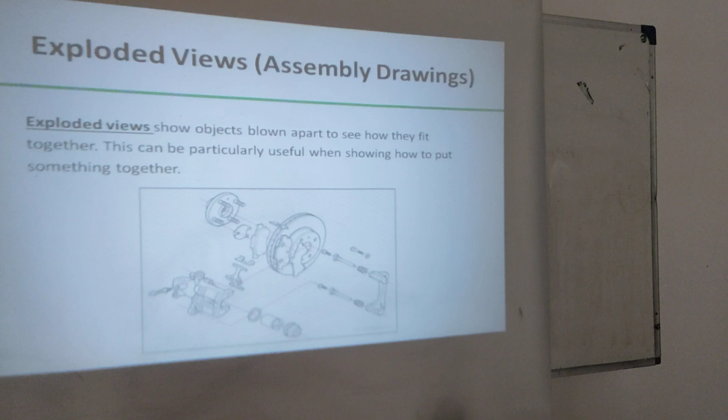So, today's class, we will explain exploded views, which are assembly drawings. This is again one of the methods, one of the types of drawings, we would say, that is used sometimes in design. Not always you require an exploded view, but if any of the items that you're designing, any of the objects, has a lot of parts, it is advisable always to have an exploded view as part of your engineering drawings, because this will clarify each part, what it will be, and how they come together.

So, exploded views show objects blown apart to see how they fit together. So which part goes where. So it's like an instruction. Like if I look at the object assembled, like this table, everything is now together, all the parts. Maybe I don't know, if I receive it in separate parts, how to assemble it together. So it shows you how you can assemble something together and disassemble it apart.

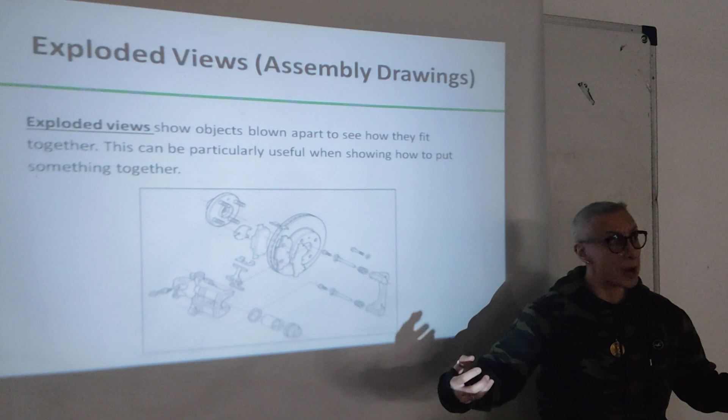Also, if you draw this kind of drawing, anyone who views it knows each of the parts, knows exactly how many pieces you have, what their size is. So anybody can make, produce, manufacture your designed idea. So all of these parts are clearly visible and where each of the parts will come together. So these drawings are very useful, as I said, if you have designs that have several parts.

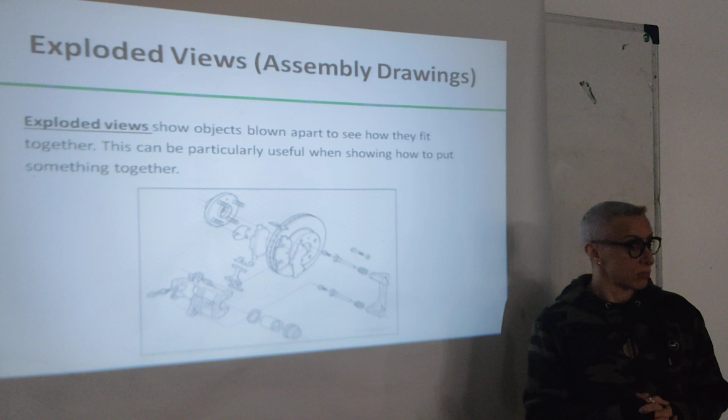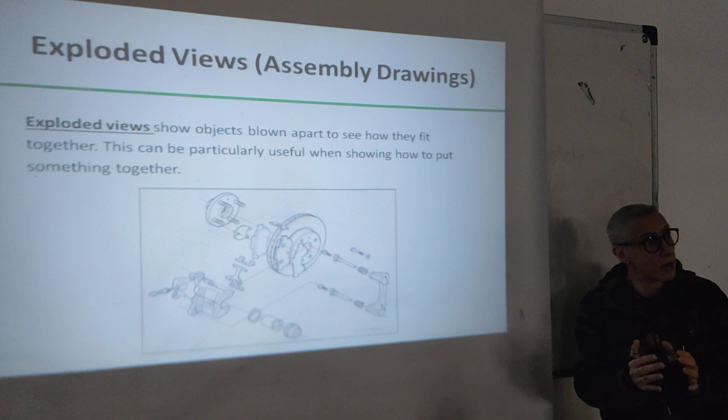And most of the designs have parts. This table is made out of many parts. This chair is made out of several parts. Some designs have hundreds of parts. Some designs are more simple with fewer parts. But if you're designing any object, it has parts most of the time. So these kinds of drawings are very useful in this regard. So it shows an object, basically everything apart.

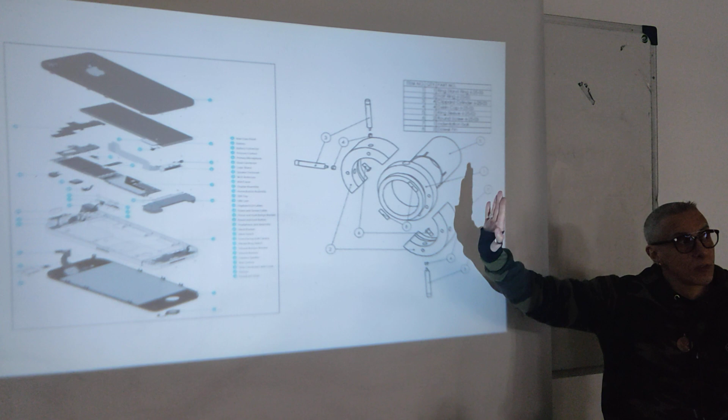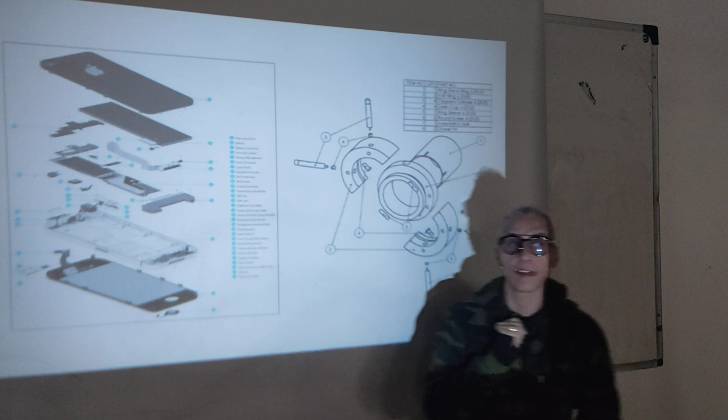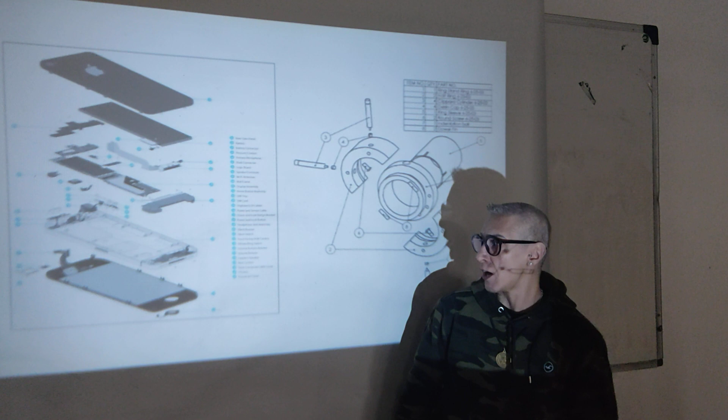Normally, these kinds of exploded views are drawn as isometric. So if you put, for example, here a line, this will be at 30 degrees, this will be at 30. And notice that all of the parts are at 30 degrees, isometric. So if you put a line here, this will be 30, line here 30. So all of this is exploded in an isometric view. Okay. Now, each piece is shown exactly in the order of assembly.

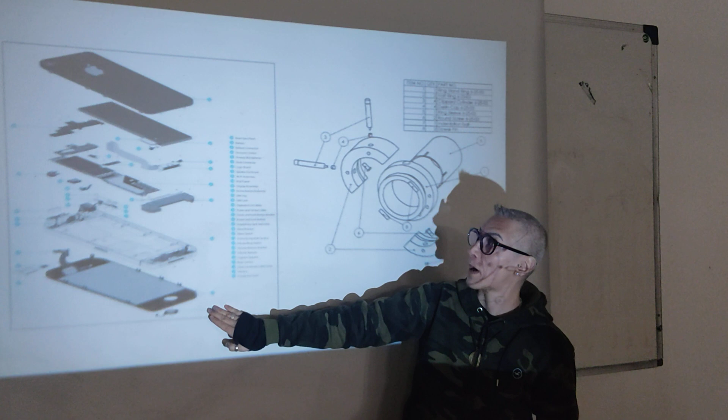So this here is the bottom piece of this mobile. This is the top piece. And in between, we have all these pieces in order. That means if I look at this, I know, okay, this is the first piece, it comes at the bottom. Then I need to put this piece here. Then this piece, if I put two lines, comes exactly in this area. This piece, if we put the lines down, is located in this area.

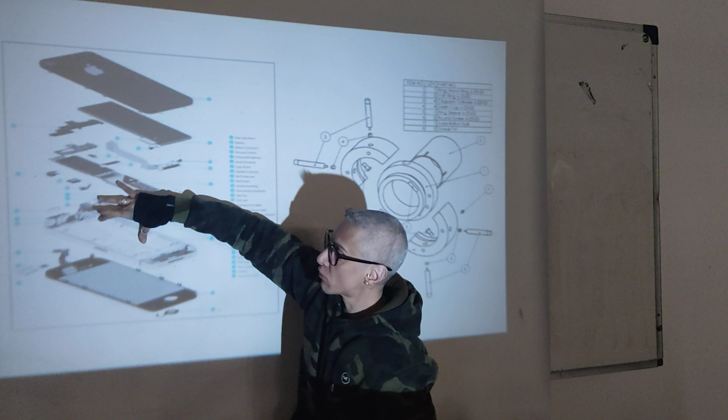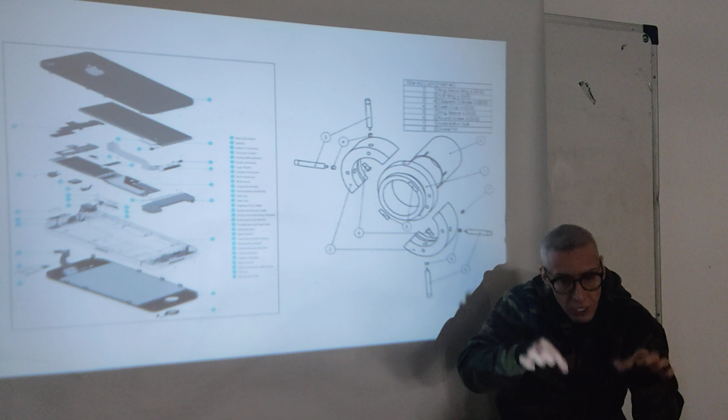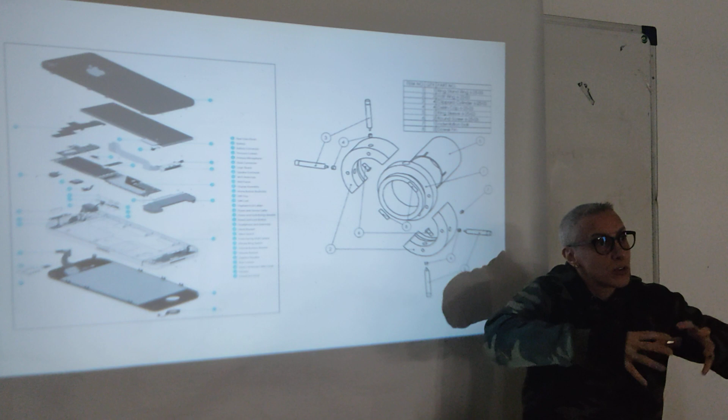Each of those pieces, when we put lines down, we know in order which piece comes above which piece, and also their location. So, if I look at this object, and you give me the mobile in pieces, and I look at this drawing, I know exactly how to put it together, assemble it together, okay? Because I have this instruction now. Each piece, I know where it belongs, where it should be attached, okay?

So, now, you need to pay attention to something. All of this is done in isometric, as you can see. Each piece, if you put a line through it, has 30 degrees from here, 30 degrees from here. All the lines are parallel, the isometric rules. Some of the pieces, there is an axis, okay? So these pieces come on top of each other, assembled like this. So they follow the vertical axis, okay? All of these come together like this.

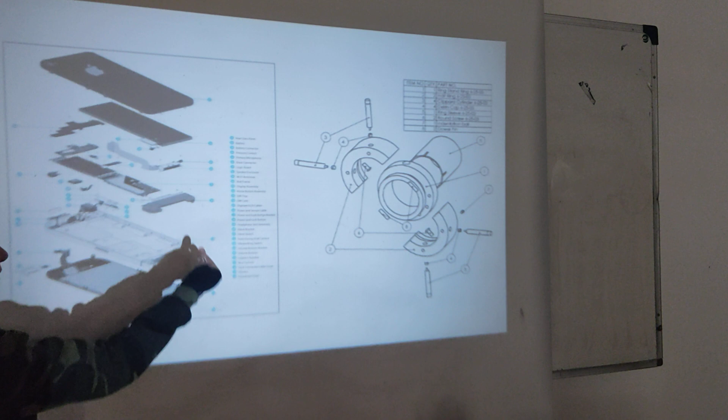But sometimes you have pieces from the side, from this side, from this side. So you have this axis, the vertical axis. You have this axis at 30 degrees, and this axis at 30 degrees. So depending on what object you're drawing, there are sometimes pieces from the side. So these have to be drawn according to the correct location.

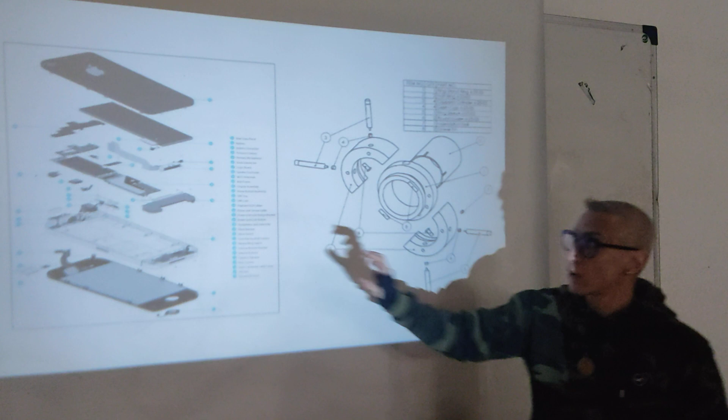So this piece, for example, attaches from this side. So this is drawn at 30 degrees from this side. This piece comes on top of this piece. It is drawn according to this axis.

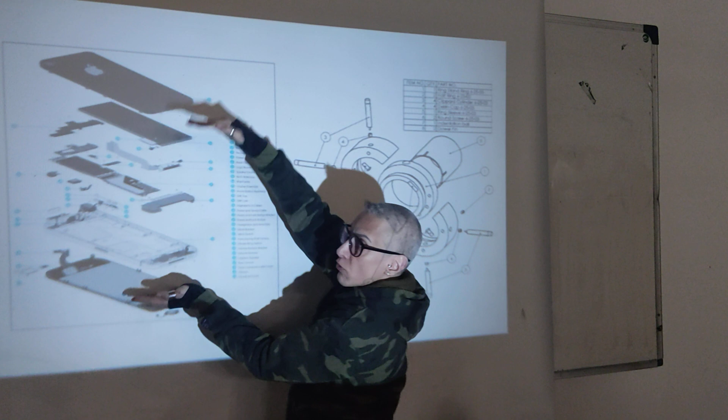So, here are some other examples, as you can see. Again, if you put a line through here, this is 30 degrees, 30 degrees. All these lines are parallel to each other. This is isometric, okay? All the pieces, look, there is the vertical axis. So, this is the bottom piece, then this comes on top of it. Then this object, if you put the lines down here, fits exactly into this space. This spring fits exactly in this location, okay?

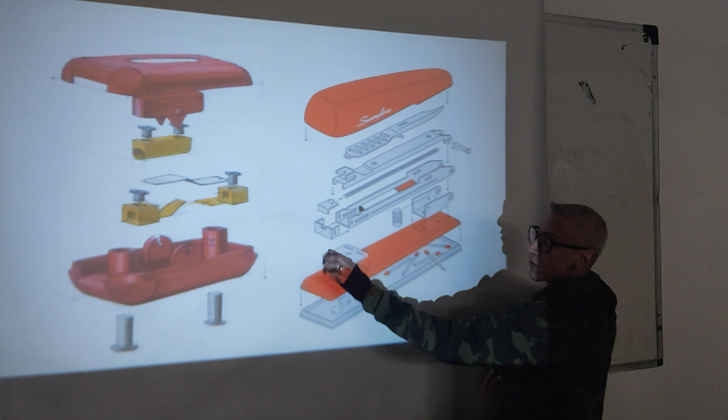So this object, if you put it down at 90 degrees, the vertical axis, it fits here. So in order. Now look at this object here. This is from the 30 degree angle from the side. This object fits on this object from here. This, where does it fit? It fits inside this hole, but it comes from this axis, okay?

So the 30 degree axis from here, it has to be drawn exploded in this direction because it fits in here. If they fit like this, you follow the vertical axis. If there is something from the side, you follow this axis. If there is something else from this side, you follow this axis, like these objects. So it really depends on what it is that you're drawing.

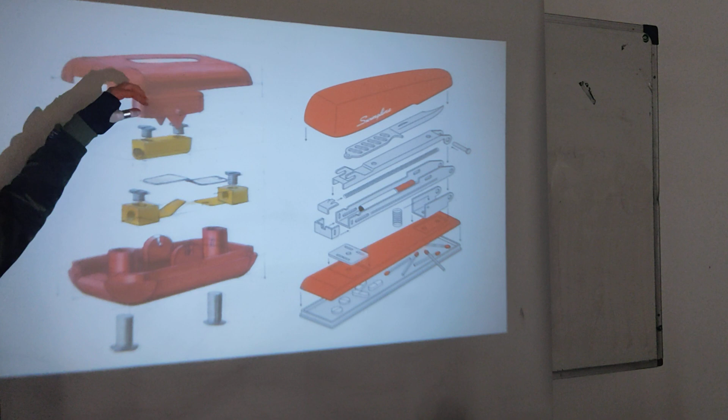Here also most of the objects follow the vertical axis. This is how they come together. Then you have these at the bottom which enter into here, and so on. So we can see exactly which piece fits where very clearly, okay? How to assemble or disassemble an object.

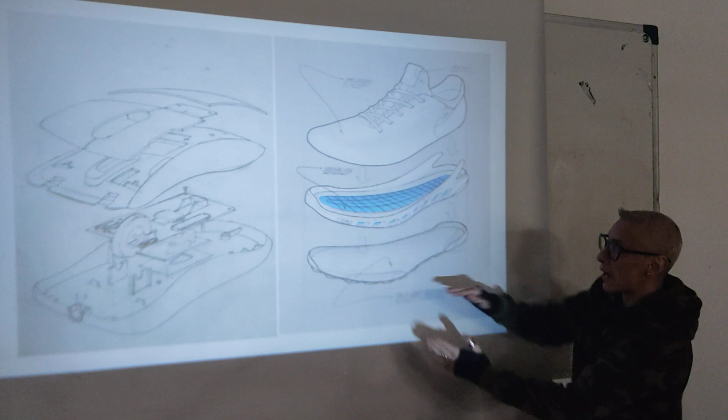So this part, this part, this part is the upper part, and they come together in this way. So this is very important to show the shape of each part and how they fit together, how they assemble. So why is this again important? Because each piece will be manufactured, made alone. So this piece will be made, then this piece, this piece, and after that someone will glue them together, if it's a shoe, okay, and stack them on top of each other.

If it's a mouse, we have a lot of parts here again. So each piece will be manufactured separately, and then someone will take these pieces and assemble them together. So these drawings are crucial in this regard. If you don't have this kind of drawings, exploded views, you will not know what you are designing, how each piece will look, the measurements, how they will come together. This will be not very clear.

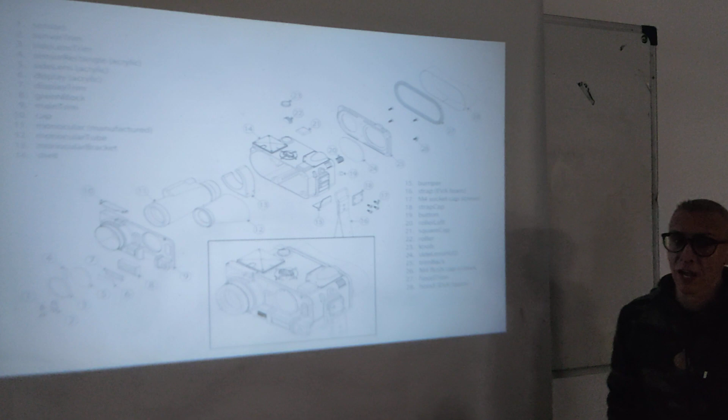Here is another example. In the previous drawings, we saw most of the exploded view is in a vertical axis with pieces from the side, for example, here. Most of it is in one of the 30 degree axes because of the object. This is a camera. If you explode it, how will it go? There are pieces that come from the top, of course, and the bottom, and the side, but most of it goes this way. So you open this piece, and you open the back piece, the last one here, the front one, and in between you have an exploded view of all the parts that fit in their correct order. Which part to put first, which second, which third, and so on.

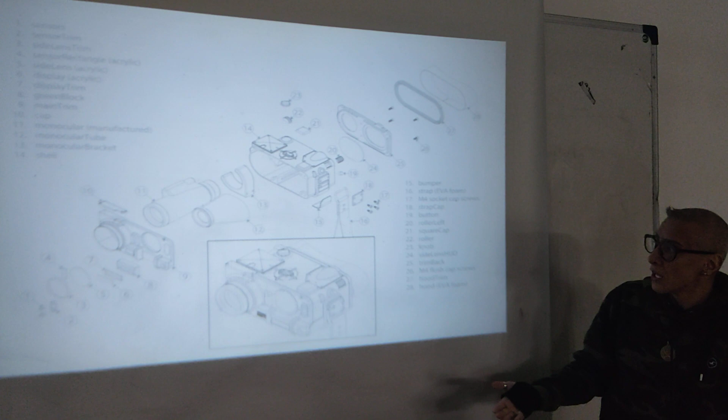And then you have the final camera. It has a lot of pieces, okay? So imagine if we don't have this drawing, how will this be manufactured or assembled? It will be very difficult to understand.

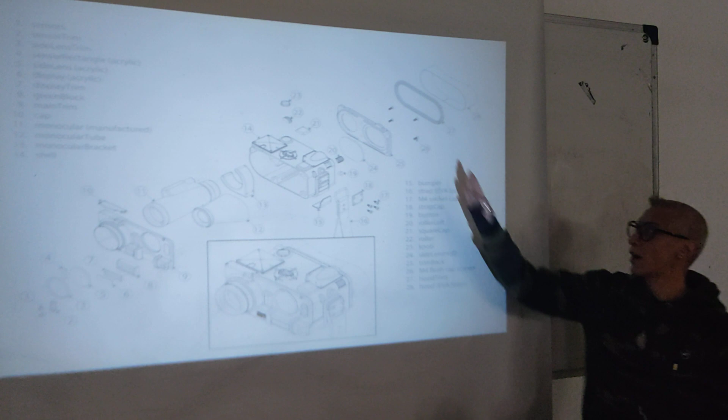Now, in exploded views, often they have a name for each part, like for example, what is this part? Sometimes they leave it as a number if you don't know the name of each of the parts, and there is additional information about it. Like this part, what is its material? So you have here a table, it's called a parts list. You will be doing these things in the project. So there will be a parts list, for example.

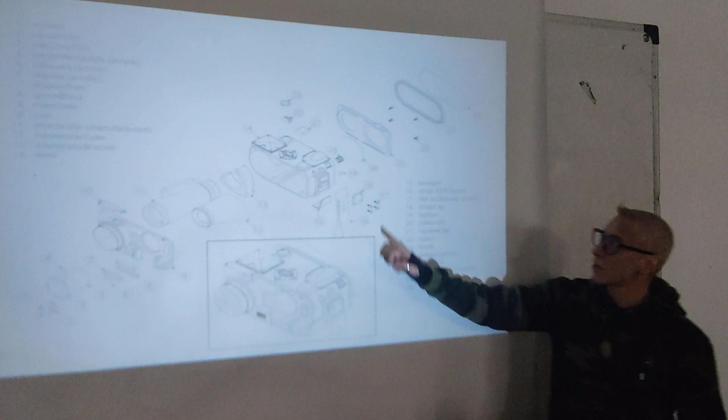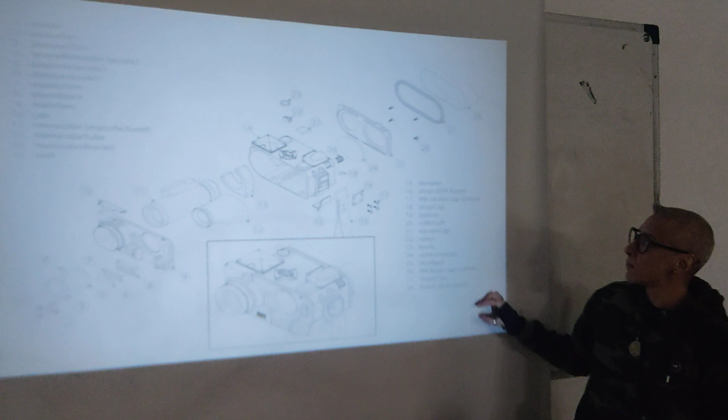Okay, what about this part here? What is this? Is this made out of plastic, glass, any other metal? We don't know from the drawing. So it's stated in the parts list: the material, the size of each of the pieces, a lot of details, the finishing, the color. So everything about these parts is stated in a table here, in this kind of drawings.

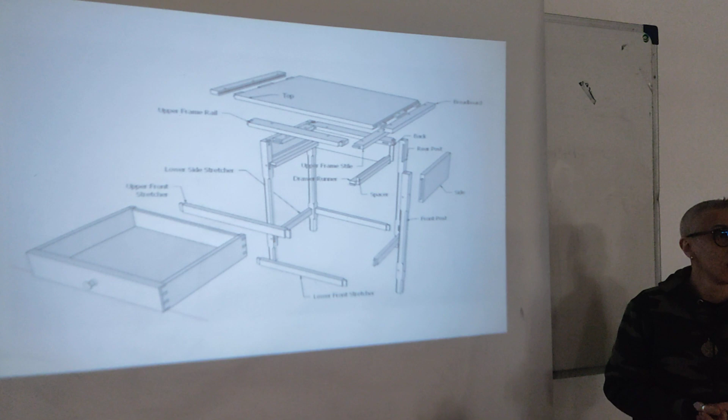A desk, okay? Even a simple desk is made out of many parts. If this is wood, for example, or has wooden elements and metal elements, each one of these is cut separately, and then we assemble them together. And if you are the designer of this, you have to figure out exactly how each of these parts will look. Imagine you're designing a furniture piece.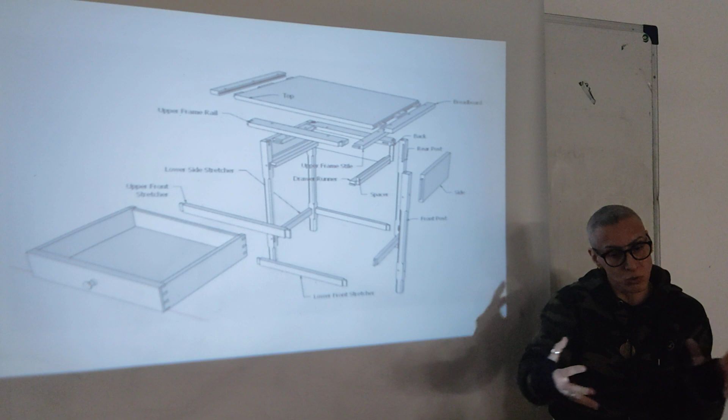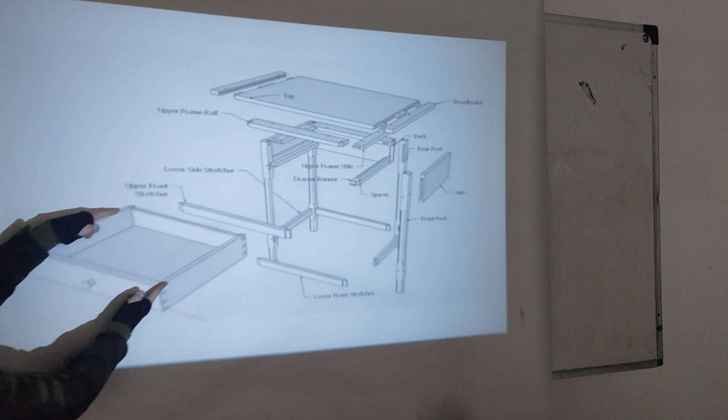It is not about drawing a sketch on a paper. After the sketch, you need to figure out the measurements. The measurements of what? Of each part. And each part, when it is cut, manufactured, and assembled together, must fit perfectly. So, where does this belong? This is here from the side. So if we take the lines at 30 degrees, it should fit in its correct location. Each of these parts should be shown how it fits together. And they should fit perfectly.

Any mistake in any of these measurements, after it's cut, after it's manufactured, and someone will assemble them together, they will not fit. And this is a big problem. So you are actually the designer of all this. If you are designing a table, a desk, these things, you are the one who figures it out. And one way is to draw, besides the orthographic drawings, besides the other types that we talked about, an exploded view is necessary in this kind of drawing.

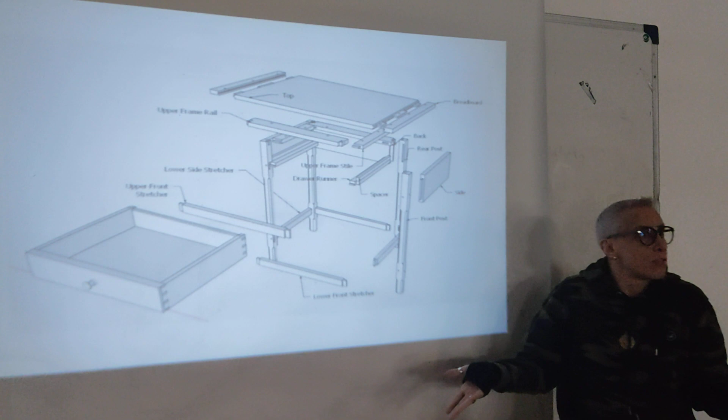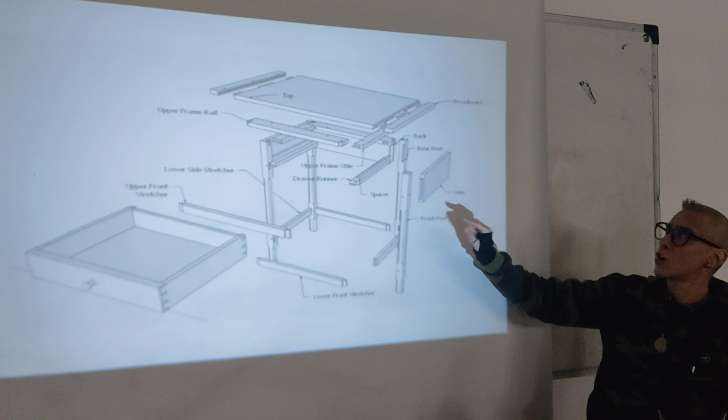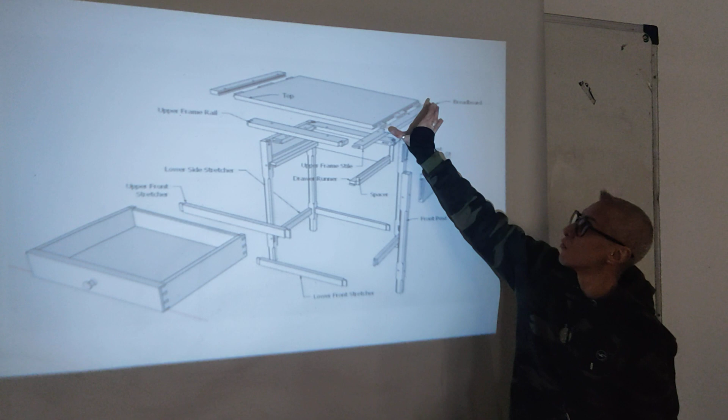And why is isometric used? Because the isometric shows the actual measurements. It's not a perspective drawing to fool us or not understand the measurement. Isometric uses the actual measurements and it shows you exactly. So you can draw this drawing scale 1 to 1, scale 1 to 2, scale 1 to 10, and then I can exactly know each piece, what is its measurements. Exactly, from the drawing. I can measure it, and okay, this is 1 to 2 scale, so it's 2 times smaller. So this piece times 2, I know its real size. And I know exactly what to make, how to make it.

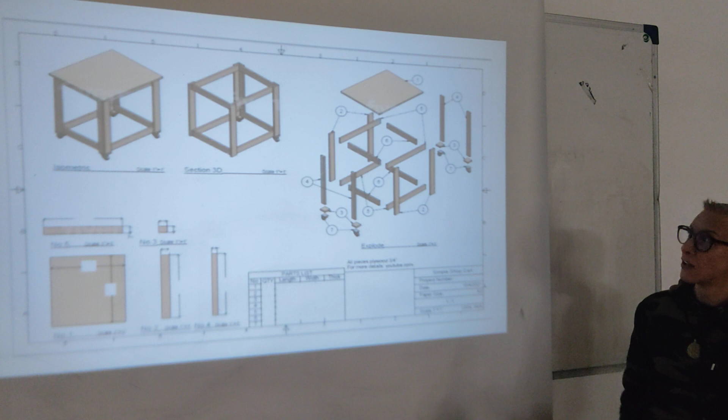Here are more examples, the same thing. Look, this is the object. Look how simple it looks, but it is made out of many parts. Okay, so looking at that, we don't understand how many parts we have, how we cut it, what is the size of each part, some parts are hidden, some... Okay, so we need to show the exploded view and know exactly each part and its location, okay?

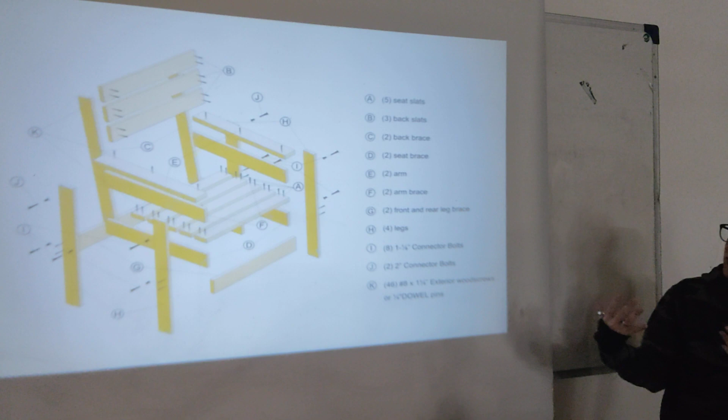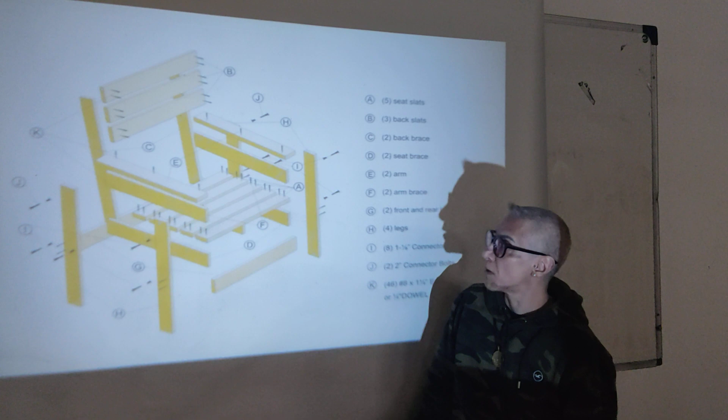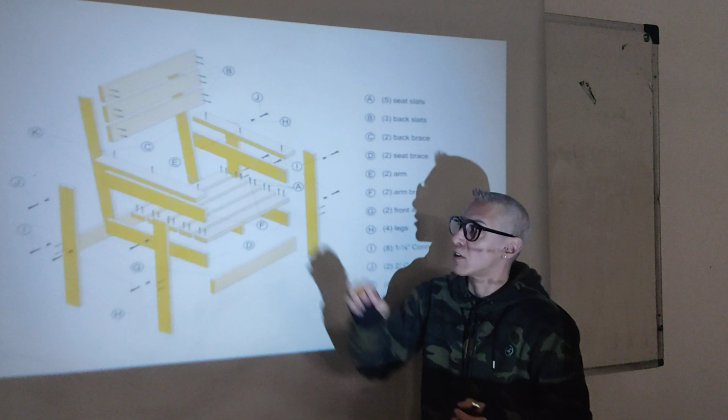Look at this. Simple chairs that we see every day, but at some point they were designed by someone. This someone figured out each piece, where it is going to be located, how it is going to be assembled, to the last detail. These are what? Okay? The objects that fit one piece to another piece. Even they have sizes. They are usually made out of metal, pins, screws, whatever. There are many different types. If you use it in your design, you have to know what you are using and where it fits. According to these lines, we understand where each of these objects fit together, okay? When we put it, assemble it together.

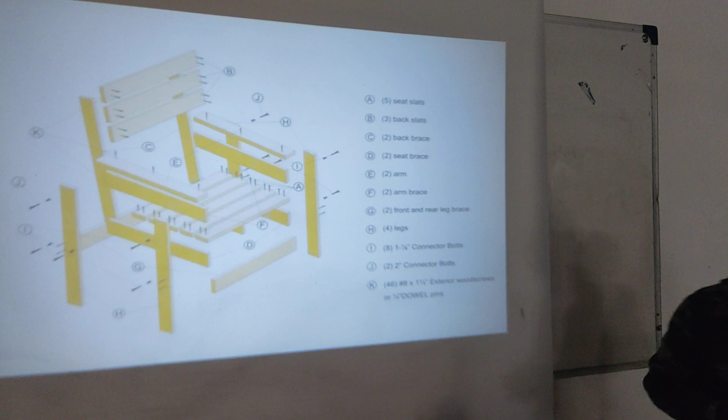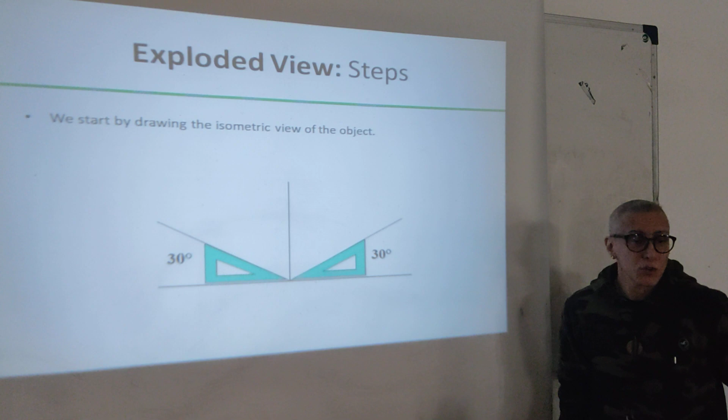Let me see here, what is this? Yeah, okay. So, the exploded view of an object starts as usual. We have the first edge, then we will draw 2 lines at 30 degrees, and then the first thing you will draw is the bottom part of the object. Then, what comes on top? Then what comes on top? All of them at 30 degrees. Okay?

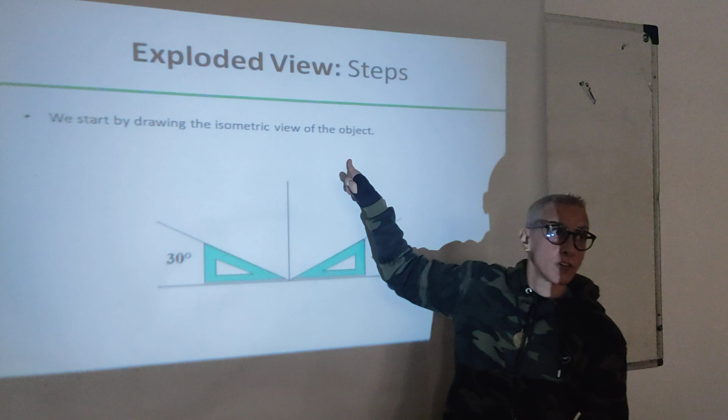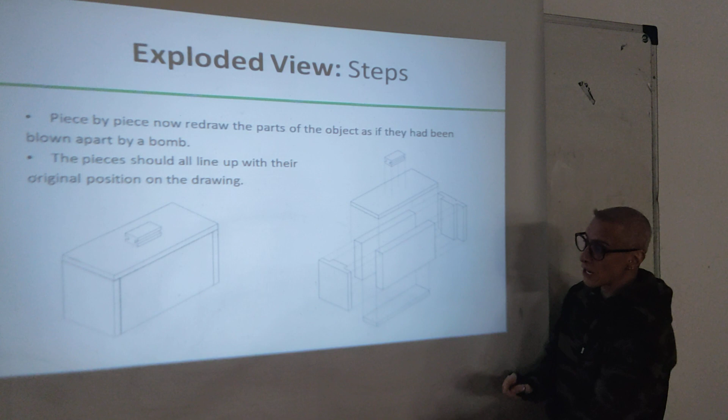Here is a simple example. That box in exploded view. So what do we have here at the bottom? Okay, this piece. This is at 30 degrees. This is the first edge. Okay, great. What is its thickness? What is its length? The width, the height, all of this stuff. Then you draw what happens next. These pieces fit here. This piece comes from the side at 30 degrees, fits from here. This piece. Okay, comes from here. There is also a piece that comes from this side, which is this. And here we can see its shape in detail because it's exploded now. And then the top piece.

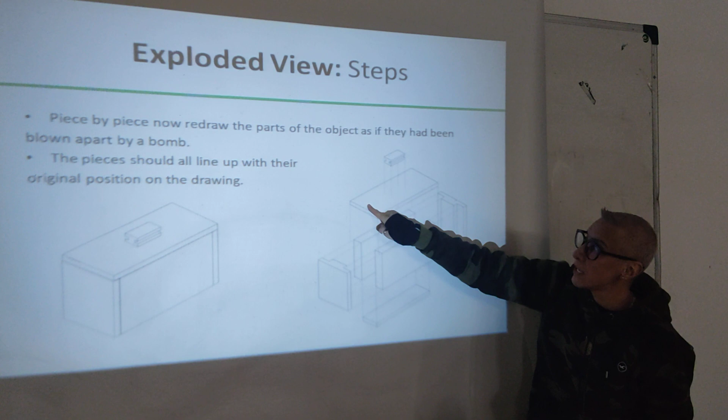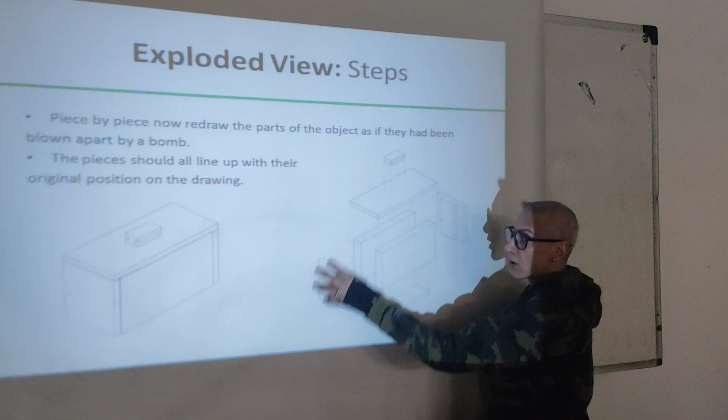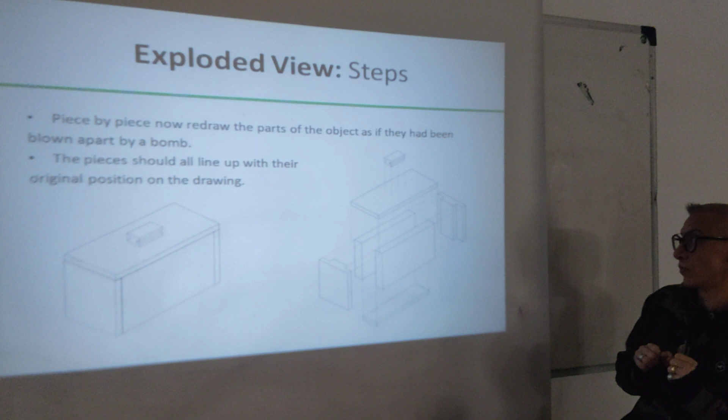And look at this piece here with these vertical lines. It shows you exactly where it should fit. That's why it's placed here. It's exactly in the middle. Now, if you in your drawing draw it here, this will mean to the viewer that it's located here. So these straight lines down and the lines at 30 degrees from both sides indicate where the object will be. This is very important, not to shift. Like you cannot draw this here, because it will mean that it will go this way and fit here. Okay? Now we know that it goes this way at 30 degrees and fits in this location. So be careful where you put the items. And there are only 3 directions. Vertical, 30 degrees, 30 degrees. Okay, that's it.

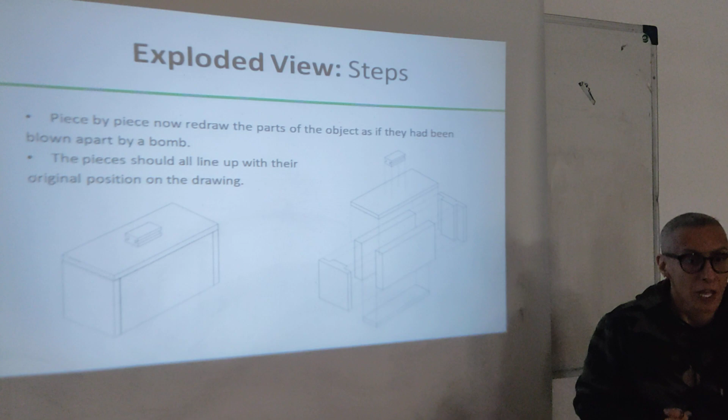Okay, these lines are usually drawn very light or with small dotted lines so that visually we can understand where each piece is fitted. In some of the drawings they leave them out, but this way it's easier to understand.

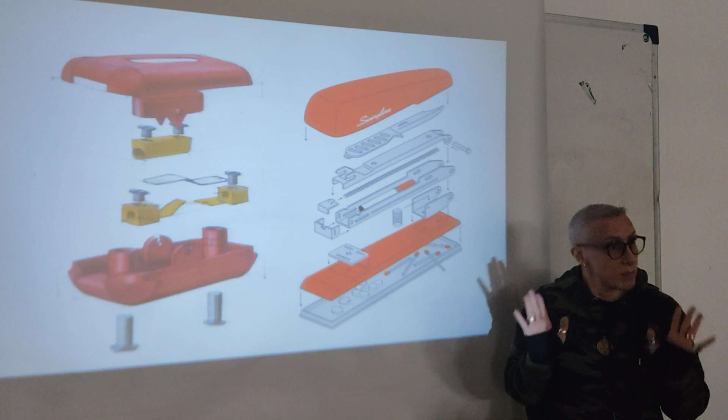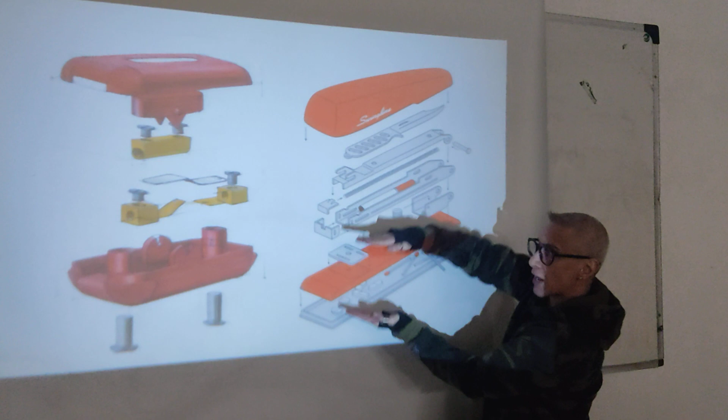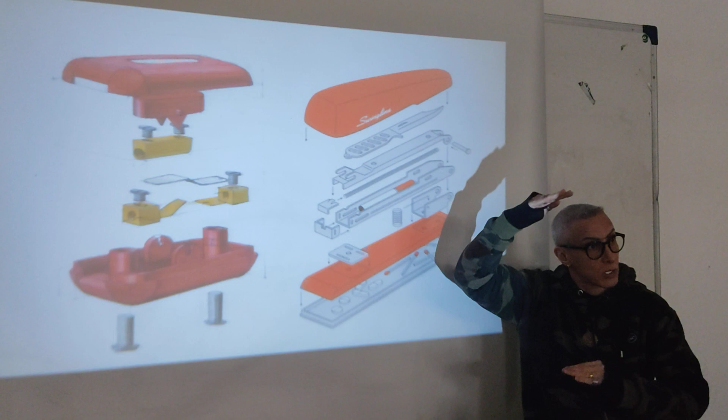Now, the spaces in between. Let me go back to this drawing. Okay, for example, this. Now, maybe someone will ask themselves, okay, how much space to leave between each piece? This is not important. Important is that, okay, if we have a lot of pieces, we can put them closer to each other. But whatever spaces you choose, try to keep them as equal as possible. Not, for example, to have this piece here, and then this piece that much far away, okay? So, try to keep them as even as possible as you explode the object. Of course, as you can see, some objects are drawn closer, like this is drawn closer to this. So, it's not a fixed rule that they have to be equal, okay? Some objects you draw closer, some far away.

But overall, when we look, we don't want to see one object far away, one object very close. It's just visually not good. And so these spaces, it depends. Like if I have a lot of parts, I will reduce. If I have a few parts, I can leave more space. But you need to be careful that one part doesn't obscure another part.

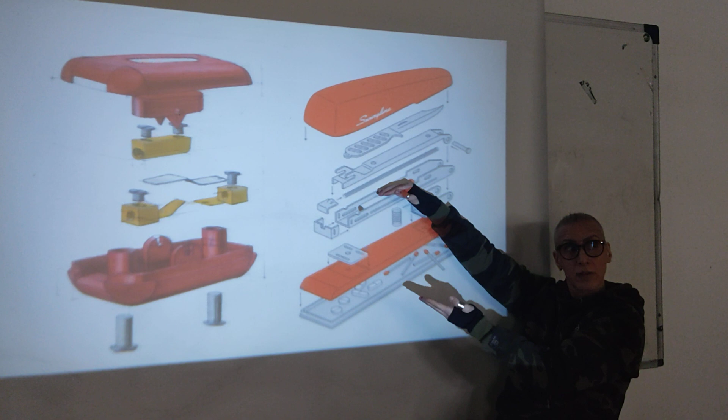Like if you put them too close to each other, maybe this part will be kind of hiding some of the features of this part. Sometimes it's okay when the hidden part is not so important, or for example, it's clear that it's a symmetrical object. But be careful with objects overlapping while you explode. So leave sufficient space so that we can see the whole part.

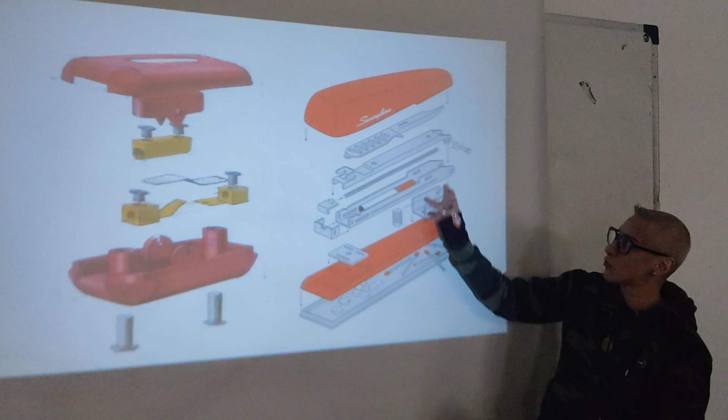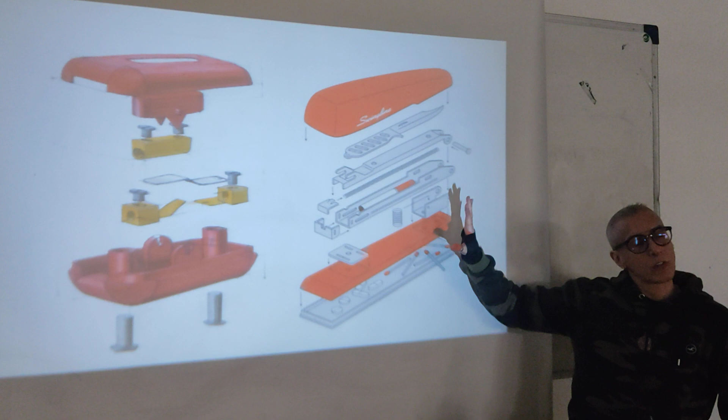This is better. Okay? We can see the entire part, how it looks, without hiding any element. So this is the thing that you need to be careful about: not to put them too close to each other and start overlapping the different parts. Here again, as you can see, we can see clearly all of the separate parts. So this is advisable.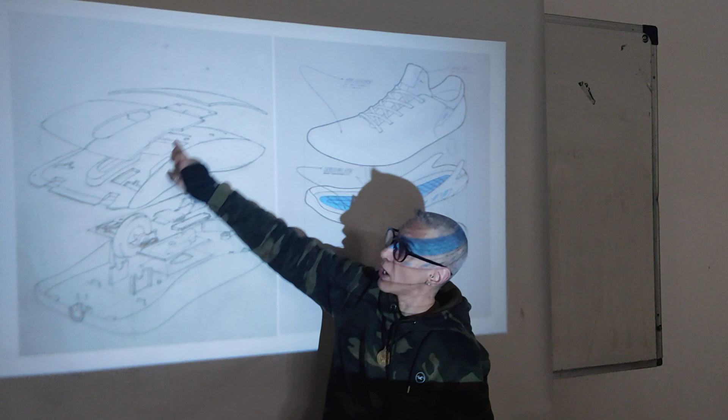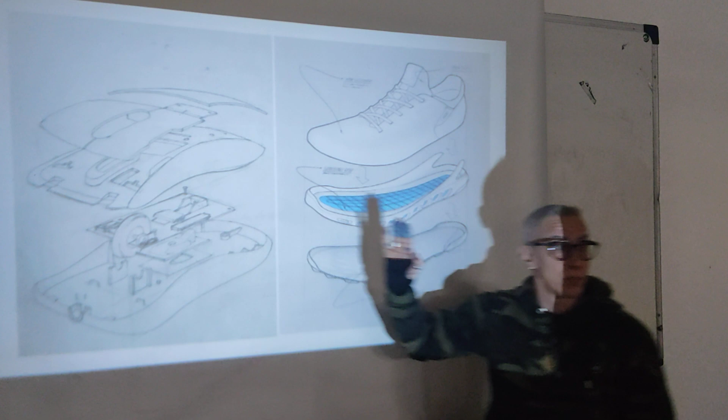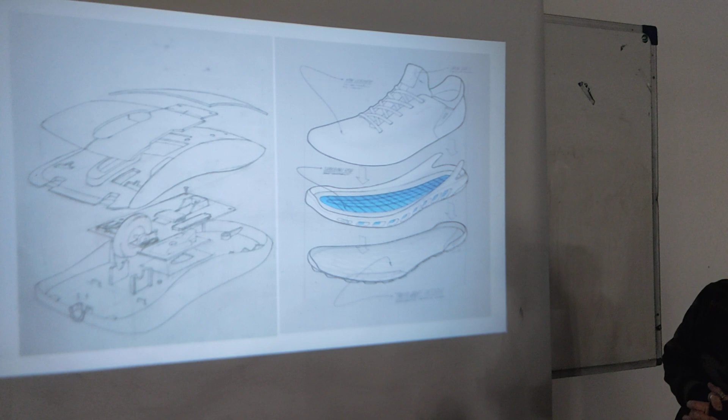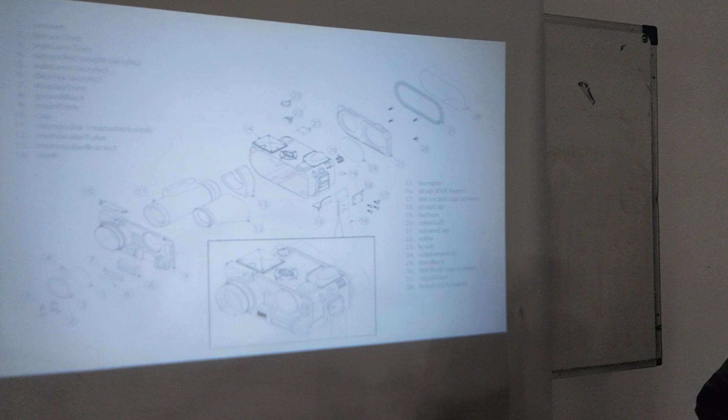Now here, do you see how this object overlaps this part of this piece? But in this case, it doesn't cause any problem for the understanding of the object. But if it overlaps and hides important parts, then it is problematic, okay? So just keep this in mind. Here again, all the parts, we can see them separately. Nothing really overlaps and hides pieces.

Now, the last exercise for this section, exercise 13, it's optional. That means who does it gets extra points. Who doesn't do it, no extra points, okay? So this is optional. Exploded views we will not draw, but in the project, so you still need to know about them. If you want, do it as a practice. And this is a very simple exercise.

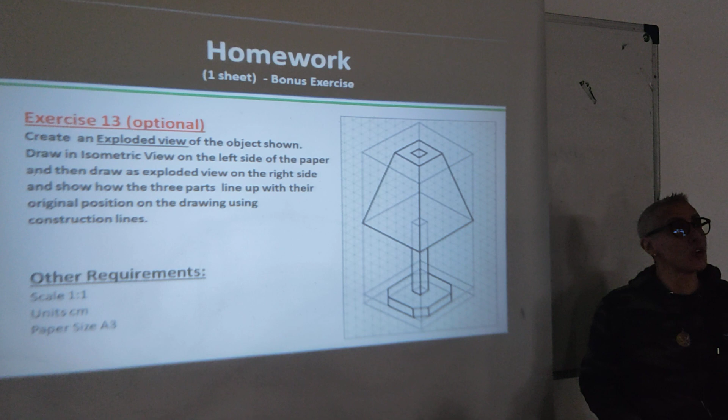So we have here this lamp. How many pieces do we have? We have this piece here, this piece, and this piece, 3 pieces only. Now, according to their order of assembly, you need to draw them in exploded view. As you can see, it's already in isometric at 30-30. You just need to explode the pieces according to their order. Do you need the vertical axis? Are there any pieces from the side? No. Just the vertical axis, okay?

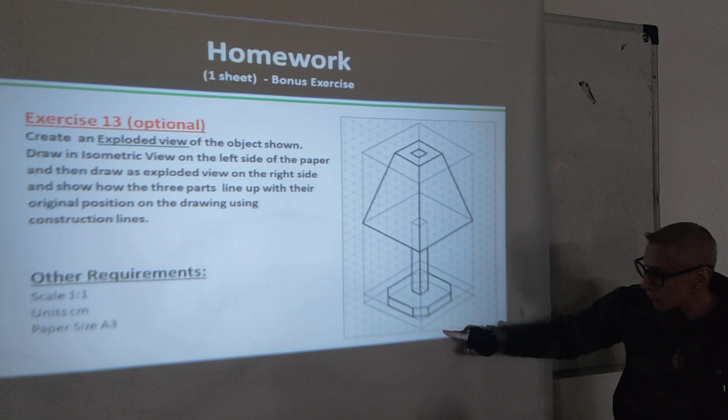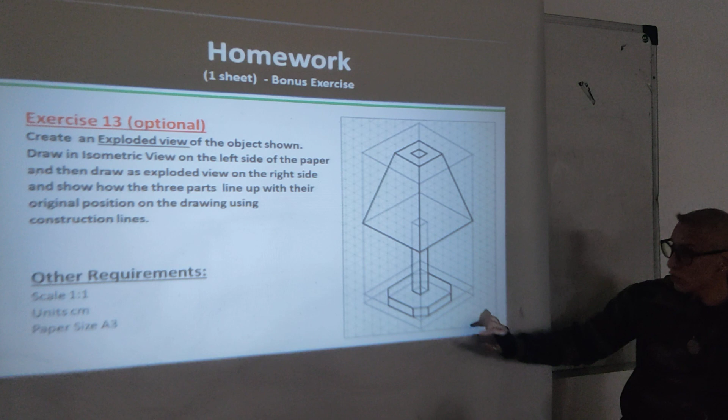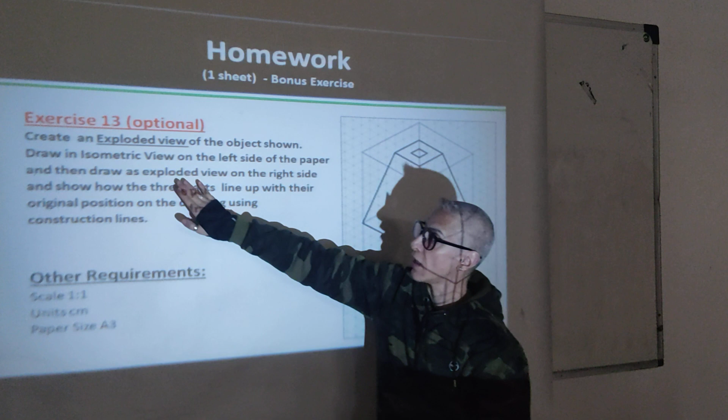So you need to draw the isometric view on the left side of the paper, and then draw the exploded view on the right side of the paper. So we will have the A3 paper. Here we have this object assembled together, and on this side exploded in isometric. That's it.

Now, until now, you should have completed 13 exercises, which equals 15 drawings, because some exercises have 2 drawings to do. So 15 drawings and 1 optional, the last one. But every one of you must have 15 drawings for submission, okay?

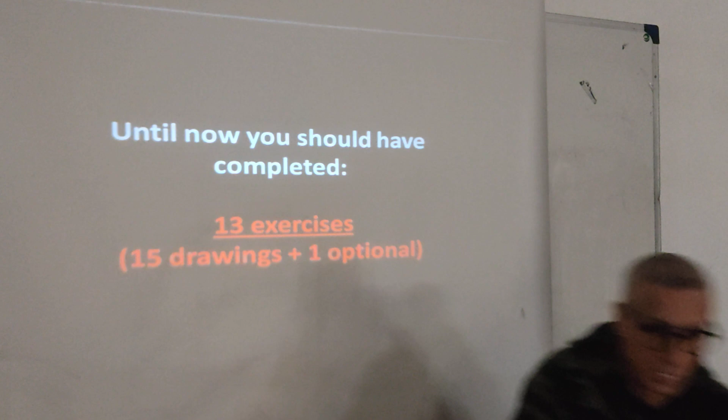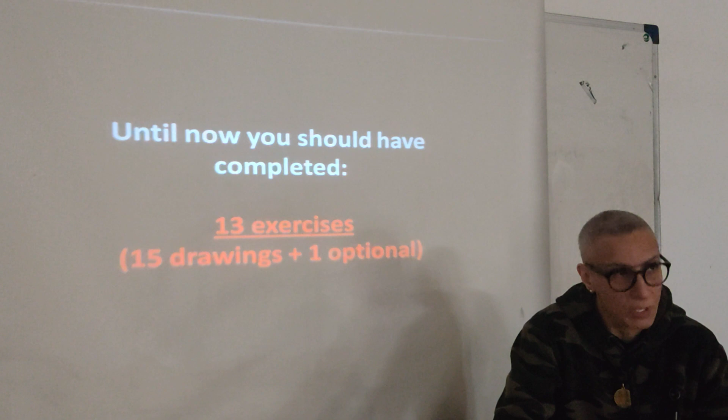Next class, we will have an exam worth 15% and the submission of all your drawings. So you will come to the class and submit your drawings, in order please. Don't forget to print the labels, and make sure not to make a mistake in the labels. For example, you need to mention which exercise it is, what's the name of the exercise. Be careful with the scale, because each exercise has different scales. Just be sure not to make mistakes.

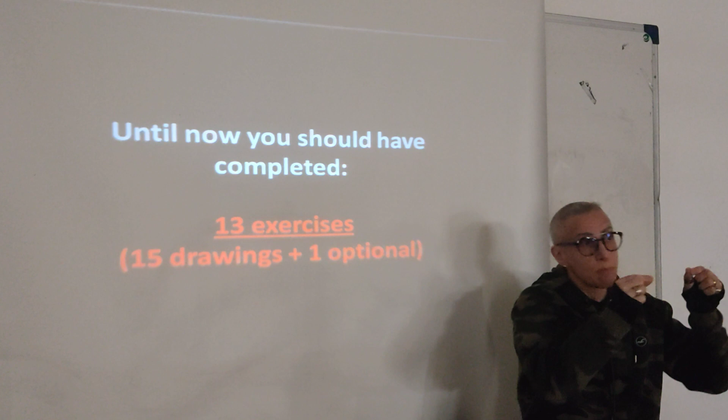So the labels need to be printed and glued. You can either write the views in a very clean way, so top view, side view, front view, or you can print labels again and glue them in a very clear and nice way. You choose what you want. So next class you will submit the drawings in order, in a file or whatever. If you want to submit them just as drawings, it's okay. And you will sit to do the exam.

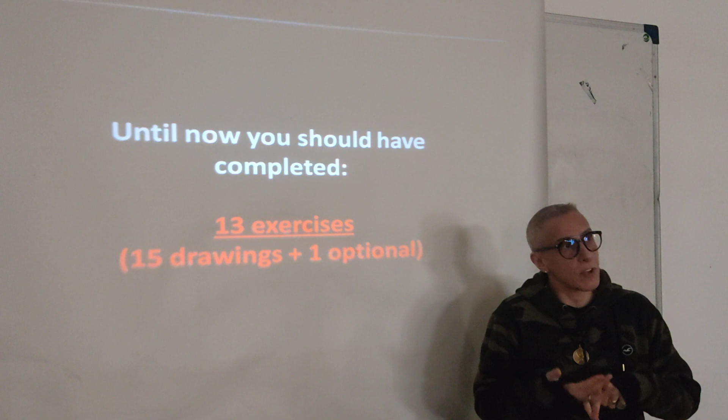The exam, as I said before, will consist of some multiple choice questions and some drawings that you need to do. So you need Fabriano paper, your rulers, pencil, all of this stuff with you. Okay? Any questions?